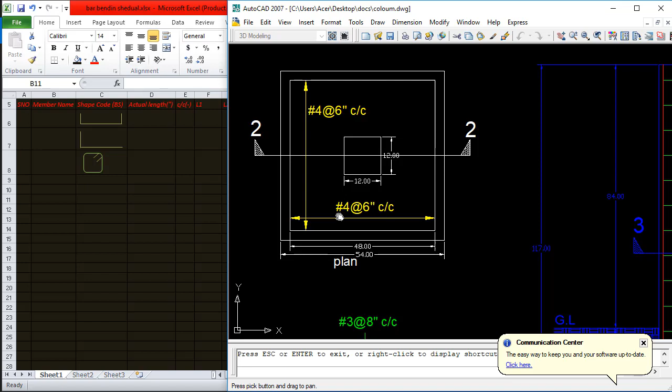For that I have a formula: the length of the footing, which is 48 inches. Now I have to divide this 48 inches by the center to center spacing of the bars, which is 6 inches. So 48 divided by 6, and add 1.

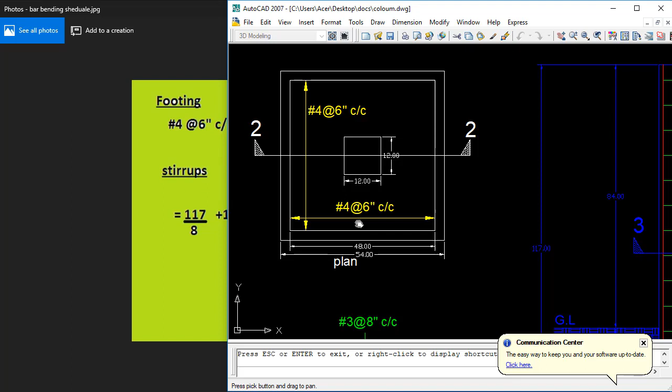According to the rule you have to add 1 and multiply it by 2. Why multiply by 2? Because the steel that we provide in the footing is the same in both directions. So I will calculate it for one direction and then for the other direction I will multiply it by 2. So I have got 18 numbers of bar for the footing slab.

Now I have to prepare the bar bending schedule for this particular footing. You can see the bar is a U-shaped bar. The actual length will be 48 inches, which is the length of the footing, and I will subtract the clear cover from both sides. From one side it is 1.5 and from the other side it is also 1.5, so the clear cover will be 3 inches.

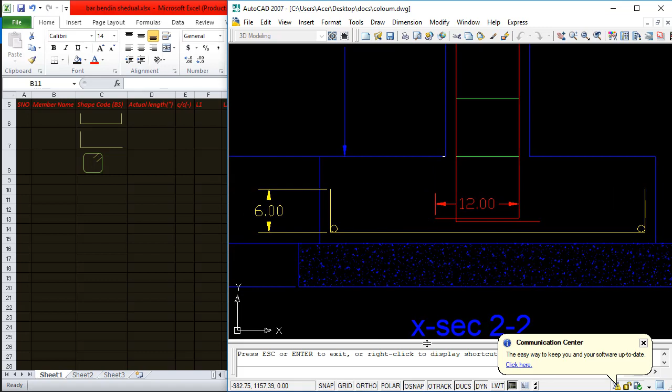There are two hooks, one is 6 inches and the other one is also 6 inches, so the extra length, which is the hook, will be 12 inches. Now come here to the Excel sheet.

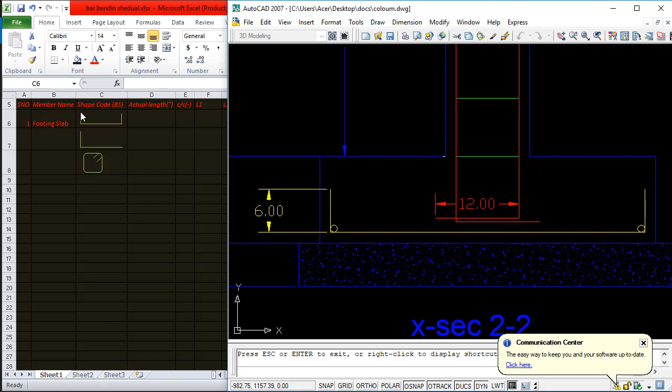Serial number will be 1 and member name is footing slab. I have already inserted the bar shape for this particular bar, which is a U-shape bar. Actual length is 48 inches, which is the length of the footing slab.

Clear cover is 3 inches, as I already told you. And the extra length, bar extra, which is the hook length from both sides, is 6 from one side and 6 from the other side, so it will become 12 inches, and there is no other extra length in this particular bar.

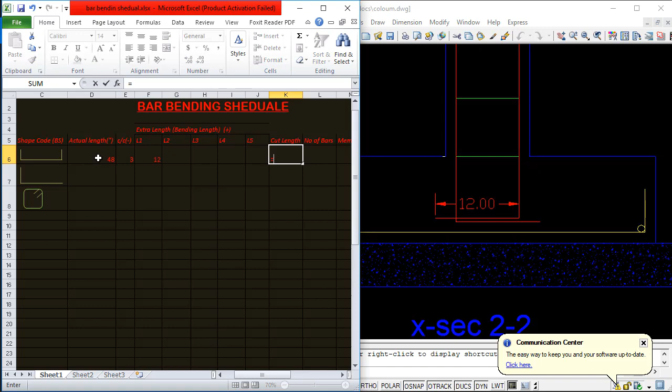Now I will calculate the cut length. For cut length, I will subtract the clear cover from the actual length and add the extra length to that actual length, so I will get the cut length. This is actual length, minus clear cover, plus this extra length. So I will get 57 inches of cut length.

All the values are in inches. Now number of bars, as I already calculated, is 18 numbers, and the member is one, so it will be this. Now totally, what will be the total length in inches? I will insert an equal sign and multiply cut length with the number of bars. So I will get 1026 inches, the length of 18 bars for the footing.

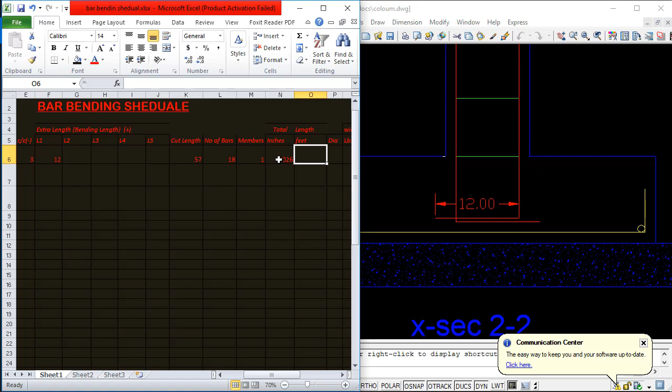So to convert this inches to feet, divide by 12, so you will get the answer. Use the calculator: 1026 divided by 12, so now it is 85.5 feet.

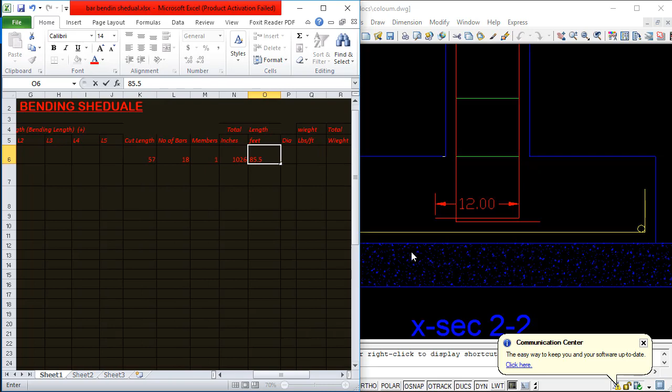And the diameter of this particular bar, we are using number 4 bar. So the diameter of number 4 bar in inches is 0.5. It is the diameter, and the weight is 0.668 pound per feet.

So I will insert the weight here. So this is the weight, the dia is 0.5, and the weight is 0.668. Okay, so now what I will do, I have to multiply this length with this weight.

I will get the total length in feet, multiply this with weight, so I will get the total weight, 57.114 pound. It will be in pound, sorry, it will be in pound.

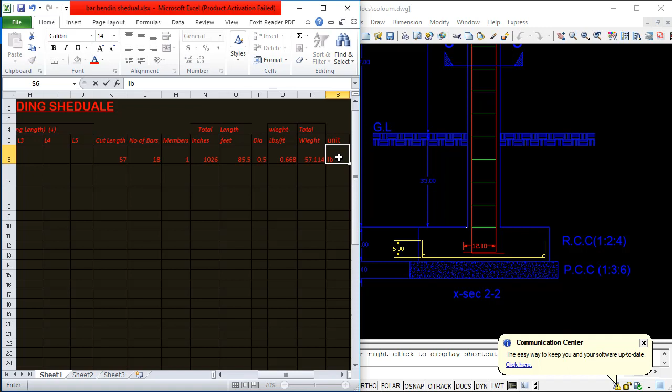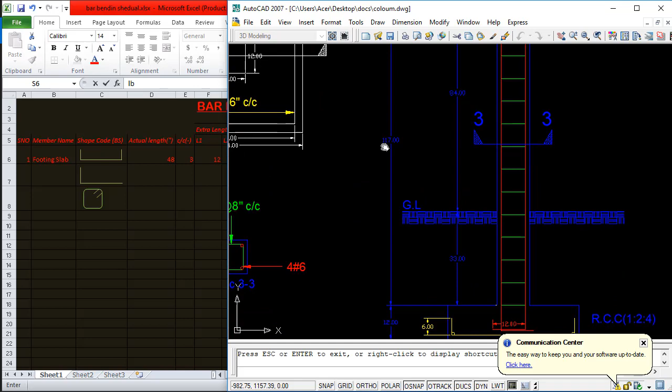Now this is the bar bending schedule for the footing slab, and after that I will prepare the bar bending schedule for this column, and according to this cross section, the length of the whole column is 117 inches. But this column is also embedded in the footing slab as well.

So what I will do is add the length of this column with the height or thickness of this footing slab, and I will get 117 plus 12, so it is 129 inches, the whole length of that column. Now after that I will subtract the clear cover from here.

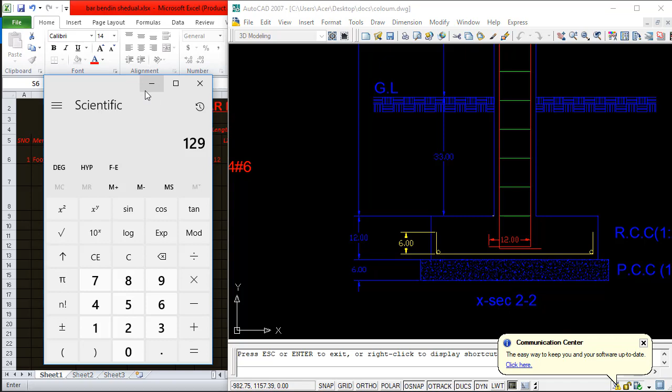If you can see, this is the footing slab and this is 1.5 clear cover, and there are two steels in both directions, with diameter of number 4 steel, which is 0.5 inches. It is two steel, one is 0.5 and the other is also 0.5, so it will be 1 inch, and the clear cover is 1.5. So if you add these two, you will get the clear cover of how much? 2.5 inches.

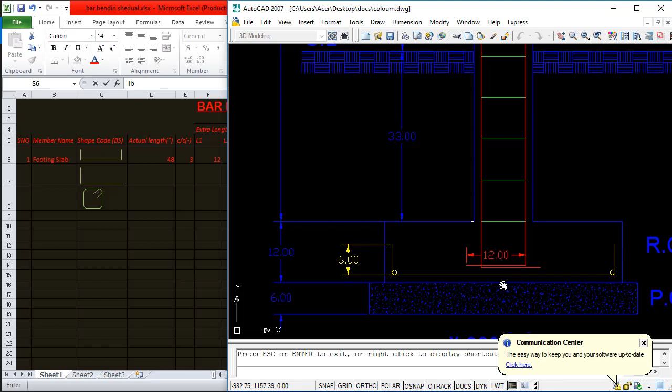So now what will you do? You will subtract that clear cover from the actual length, the actual length for the main bars of column. If you can see here, the main bars in that column is 4, and it is number 6 bar diameter, 4 number 6 bar diameter.

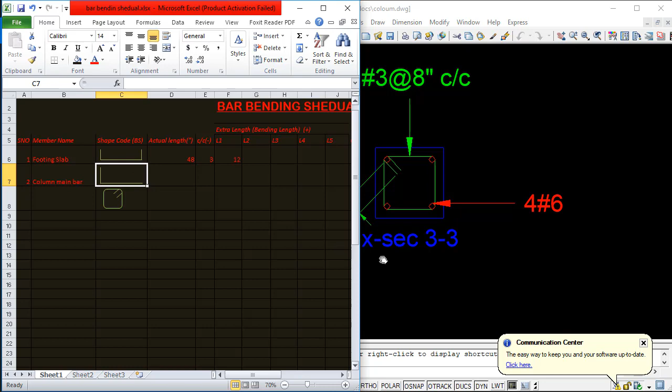So here serial number 2, and here I will insert column main bar. Now if here in this cross section, the shape of this bar is an L shape bar, so I already added the L shape bar code. The actual length is 129, and the clear cover is 2.5.

There is also a hook as well, which is 12 inches, and it is in one bar. So first now I am preparing this bar bending schedule for one bar, so I will put here 12 inches.

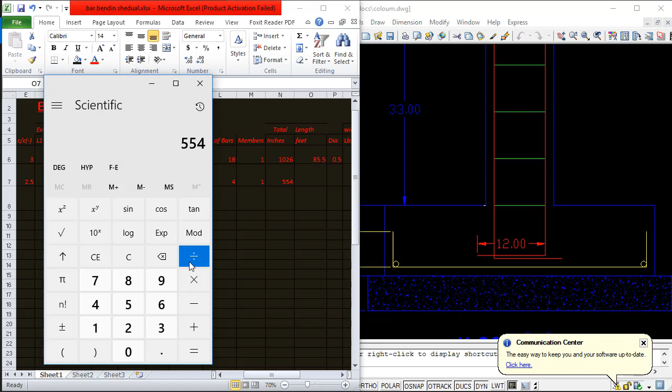The cut length will be, it is the same formula, actual length minus clear cover plus extra length, so I will get 138.5 inches, and the number of bars in main bars in column is 4, so member is 1. Now the total length in inches will be equal to cut length multiplied by this number of bars. You will get 554 inches, and if you want to calculate this in feet, convert this into feet: 554 divided by 12.

It is 46.16 feet. Now the main bar diameter is number 6 bar, so for number 6 bar you will get the diameter of 0.75 and weight is 1.502. Here the diameter is 0.75 inches, and the weight is 1.502, at the rate of weight 1.502.

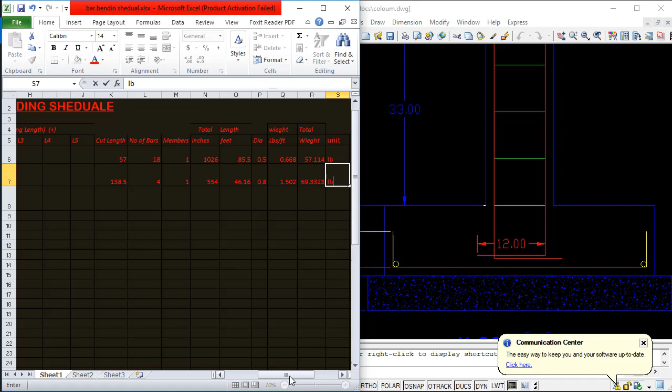Now the total weight will become this length in feet multiplied by this weight in pound per feet. So you will get the total weight of 69.33, and it will be in pounds. Now this is the bar bending schedule for column for main bar.

Now I have to calculate the stirrups as well. If you can see here, these are the stirrups, and if you take a look closely, the stirrups are only above the footing slab. It is not inside the footing slab. The stirrups are not provided inside that footing slab.

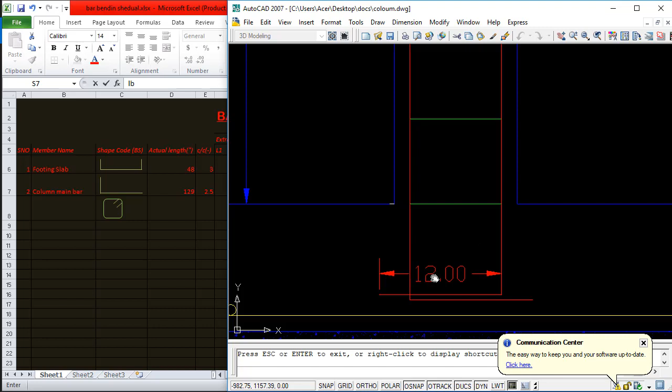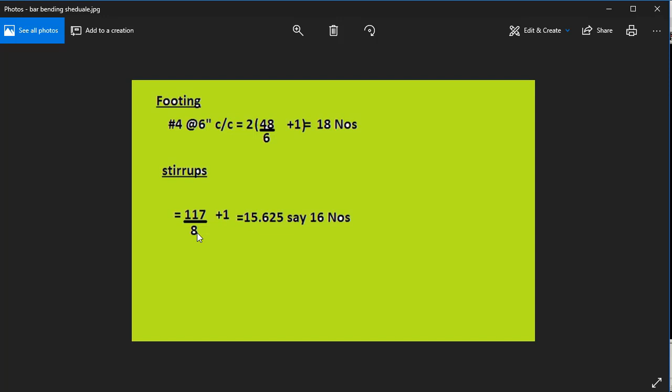So now we will calculate the number of stirrups, and the formula we got is 117, because the length of the column above the footing slab is 117 inches. Divide this by the center to center spacing, which is 8 inches, and add 1, you will get the number of stirrups, which is equal to 16 numbers.

And if you take a look at the cross section of this column, you will see here the length of the stirrup. This is 9 inches, I guess. Yes, the length of one side of this stirrup is 9 inches, so it is a square column, the other side will also be 9 inches. So the actual length for that stirrup will be 36 inches.

You already subtracted the clear cover from that, so no need to subtract again. So in number 3, it is stirrups. I have already inserted the shape code for that stirrup. Here the actual length is 36, and there is no clear cover, and the extra length is these hooks. One is 3 inches and there are two hooks, so it will be 6 inches. And then the cut length will be...

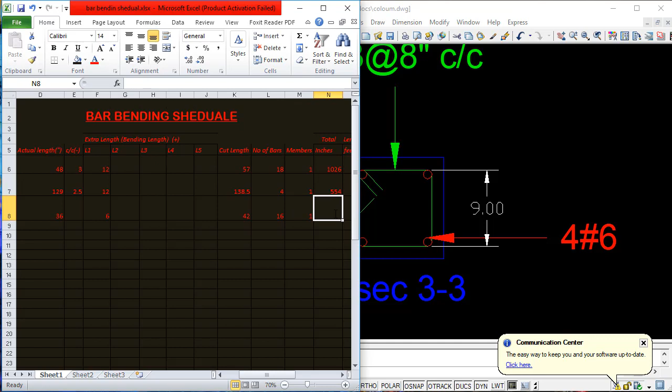Actual length plus this, it is 42, and the number of stirrups is 16, and the member is 1. Now in inches it will become 42 multiplied by the number of bars, it is 672.

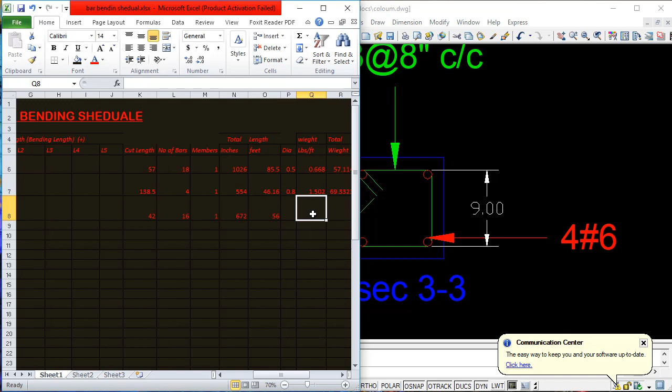Now convert this into feet. What I will do, I have to divide this by 12. 672... that is 56 feet. So now we are using the number 3 bar.

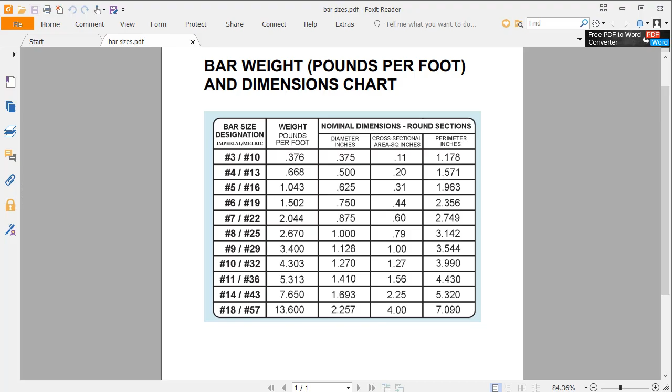Number 3 bar, so for number 3 bar, the diameter is 0.375 and the weight is 0.376. So the diameter is 0.375, and the weight is 0.376. Here you will multiply this feet with this weight, and you will get the total weight in pounds.

If you want to calculate the total weight, you have to add these three. You will get the total weight of 147.5 pounds. So this is the bar bending schedule for column and footing.

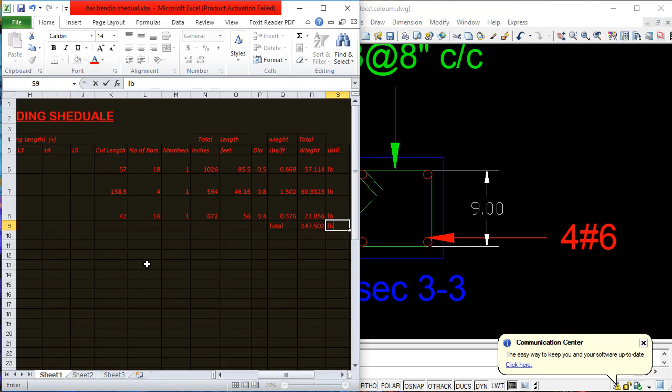And you can also prepare a bar bending schedule for column and footing if you just follow this procedure, and you only have to have a plan of column and footing. If you have a plan of column and footing, you can easily prepare a bar bending schedule for that particular column and footing.